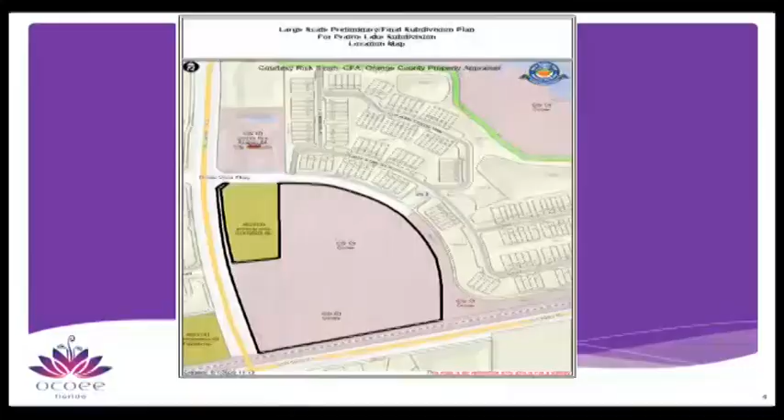Again, this is a preliminary and final subdivision plan for the Meritage Homes Prairie Lake subdivision. The property is located on the northeast corner of Clark Road and A.D. Mims Road. As you see, it's currently under ownership of the City of Ocoee. Meritage Homes is under contract to purchase the property from the city, and as part of the contractual steps is seeking government approvals for such. The property does have a little finger that goes around another piece. Let me just go over the aerial.

It's forested. You have Ocoee Vista Parkway that runs between it and the Prairie Lake Reserve Townhomes. There is a tract, part of the Prairie Lake PUD and plat, that created a tract of land the City of Ocoee has ownership of to create a future extension of the road to access the property to the rear in the future. As I said, it's part of the Prairie Lake PUD, which extends from A.D. Mims basically up to Hackney Prairie, both sides of the road. We have a fire station right across the road.

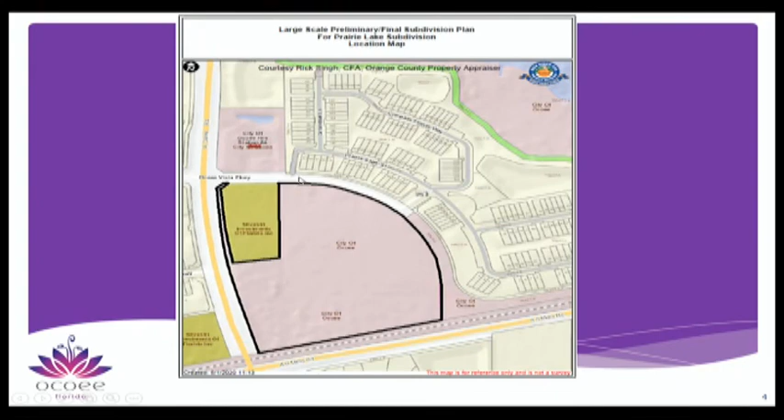The tract, under the PUD, was a commercial tract. Under our comprehensive plan, in commercial and light industrial, if you do a mixed-use development, you can have forms of medium and high density. So the parcel will contain the existing C2 owned by a different entity, maintaining a portion along the front as commercial in the plan, which creates the mixed-use development—sort of like the Weston Bay commercial up on Ocoee, Apopka, and West Road, where you have the four lots with the Dunkin' Donuts and then the residential homes behind it. It's the same philosophy.

So we have a preliminary and final subdivision plan. These are engineered documents that at the end of the process, city staff will stamp approved for construction. There are no other steps after this phase.

They are proposing 74 townhome lots, consisting of a mix of 6-unit buildings and 4-unit buildings. The exterior units will be 24 feet wide, the interior units will be 20 feet wide, and the interior living area has a minimum of 1,500 livable square feet.

The internal streets will be private. It's proposed to be developed in one phase, and the access point, there's one access point on Ocoee Vista Parkway.

So this is the, come on, get there. Get my mouse to catch up with me. There we go.

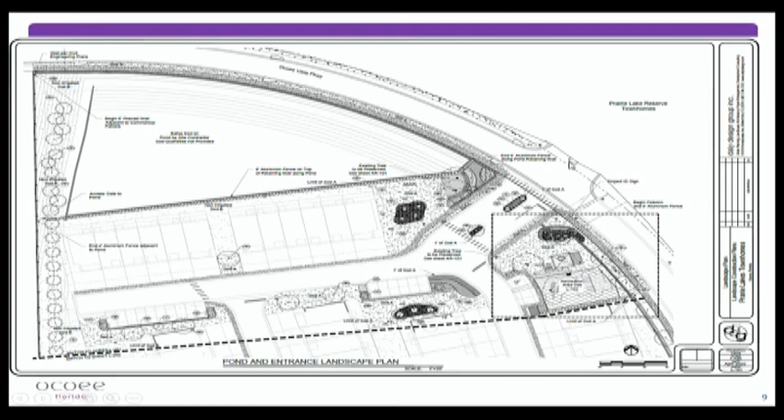The lot layouts, again, the exteriors are 24 foot, the interiors are 20-foot townhome units. They'll have open space in between them.

To blow up more of what the tot lot, picnic table, pavilion they'll have, and then you have the more passive area at the more southeastern end. So they'll have 2 tot lot areas.

This is the sort of pavilion. The fence they'll have a precast wall and mostly a decorative fence with columns. I think the columns are going to have some of the faux brick on it that I picked the wrong one for. That looks like it's all stucco, but it has faux brick which will match the entrance to the subdivision, have a little bit of upgraded look.

These townhomes, single family, all these subdivisions are part of the Prairie Lake PUD, Planned Unit Development. Back in the late 90s, early 2000s, when that PUD was approved, that PUD dedicated the right-of-way for Clark Road, the full width to encompass a 4-lane divided Clark Road, of which they constructed 2 lanes, and the inside curb of the median.

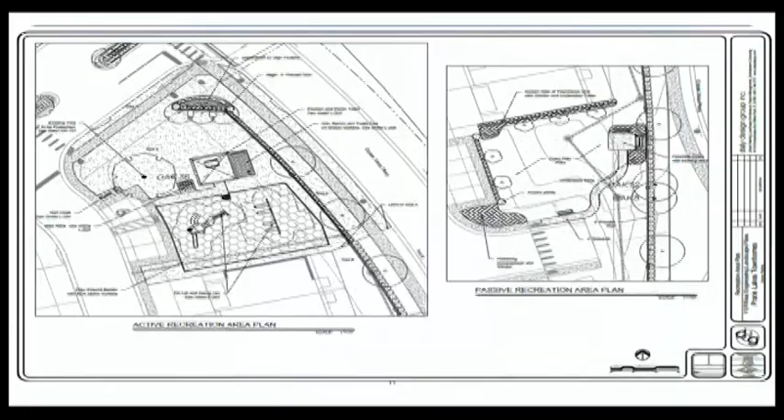Again, this is a subdivision for 74 lots. When they amended the PD, the Prairie Lake PUD has an allotment of single family, townhomes, and commercial, and they haven't used nearly the amount of townhomes which are permitted. So we did an amendment to the PUD, a non-substantial amendment, because they were not introducing a new use to the PUD, they're just moving the uses around. We changed this tract C to allow 80 townhomes, I think, more than what they're proposing. So they didn't achieve the lot number we amended the PD to by a couple of lots. With that, I'll entertain any questions, and the applicant is here.

Chairman, I do have one question. It's not specifically about the project itself, but you showed, and I missed it by the time I looked up, that there's a parcel to the east. Can you show that again? That parcel to the east is bifurcated by the railroad. Actually, there's several parcels - there's this big one, and you can't see clearly, but there's a little triangle, two little triangles. There's more parcels that go all the way over to this road.

It's all under one ownership. I've talked to people that are looking to develop it. Presently, it accesses - it's owned by this church, which is up on the other side of the railroad track. There's a little driveway right here that you can physically cross to get into the property, but it's not sufficient for a new development. And it would not ever be given that, right - that's already been looked at and discussed with the railroad years ago. So that access point would be via Ocoee Vista Parkway.

That's why, as part of this, we had the developer dedicate this land for a future road extension. There's also the opportunity - there's some wetlands here - but there is the opportunity to tie in up here. And if this parcel, or when it ever wants to develop, there's the opportunity to have two access points, depending on what it is, how many lots. We may do an emergency access to the rear, or both access points. It's just, there's some wetlands up there and floodplain. We gotta see how that works out, so.

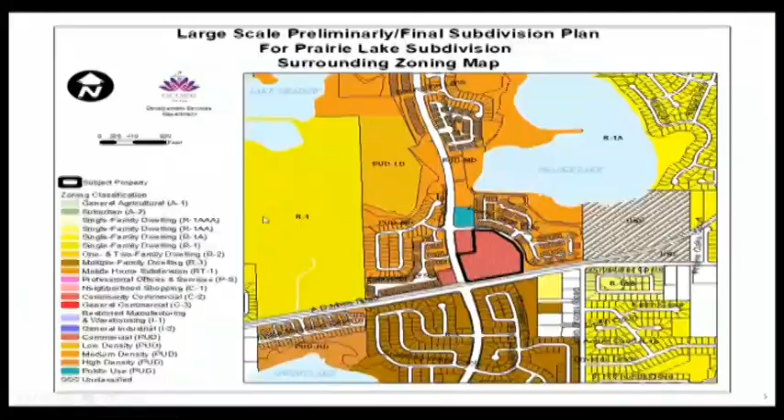We are working to get this 4-laning done through a development agreement that could speed up the process. With that design, they would go all the way to the intersection, design and engineer it for the west 2 lanes in the median. So eventually there'll be a curb cut going into to make that right turn if you're heading north. If either commercial piece comes in, that would be evaluated to do a decel lane and a curb cut to get their access points.

For this subdivision, there is not - there's just the existing access on Ocoee Vista Parkway. There were no studies done, but it's not necessary for 74 homes. Clark Road was developed 4-lane past this point with the ability to do 125,000 square feet of commercial. If the commercial exceeds 125,000 square feet, it would have to do a full traffic study because that was not contemplated in the PUD. If it comes in under that and generates 1,400 daily trips, you look at the impacts of that. This portion being really de minimis - 8 acres, 74 townhome units - creates such a low trip generation there was no need for any traffic study implementation.

All right, anything else for the applicant, or anything you'd like to add? No, we'll be here if you need us. All right, thank you. Okay, so with that, I'm going to open up the public hearing.

I'll start off by reading the 2 emails we've gotten, and then if we get any phone calls we can go to those. First one is a question from Brianne Massage, I believe it is: 'Will there be a proper turning lane coming into Ocoee Vista Parkway from North Clark Road? The turn right now is scary due to traffic levels and the lane merging from 2 to 1 right after the turn. It's not safe.' Sincerely concerned, Prairie Lake Reserve resident.

I think, Mike, that's part of what you addressed - but at this point, no, because it's already been grandfathered in with what we have. Yes, that's basically the answer to that.

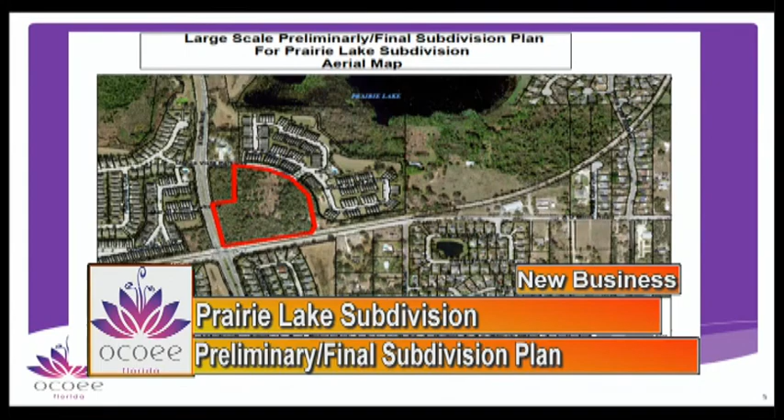All right, we've just got a few seconds left, and then we'll close the public hearing. So you don't get eventually anybody to make that commercial as well?

It is a tough location. If you're looking at this, this is commercial C2. There's a commercial node right here, and there's another one just on the north side of Hackney Prairie. The days of those little neighborhood commercial corners developing those little 2-unit retail spots, you've got Silver Star Road, which has that commercial node in Clarke.

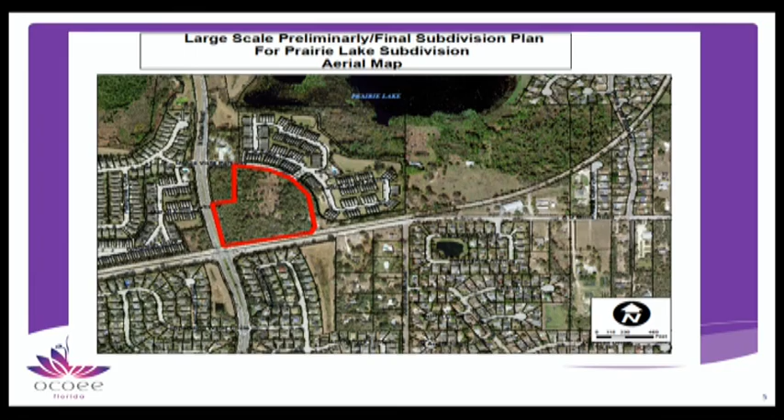Correct, all 4 corners has empty space. Maybe the Publix doesn't, but everything else has empty space. And now you have new commercial at West Road with a Publix shopping center and strip that's got some empty space. You're starting to get at the corner of Apopka Vineland and Clarcona Ocoee in the rural settlement, you've got a tire place, an auto zone, and the Wawa's looking to go in there.

The viability of this as commercial is questionable until things change. I don't know what it's ever going to become, I'd be surprised. Probably some sort of office in the future as things start to fill in and the rural nature of this area really starts to go away, the suburban rural nature.

It'd be nice to put like a little medical center, like a doctor's office, or one of those care centers where people can stop in. Urgent care. Especially with as many residents as you have in that area, I would think that one of those urgent cares would actually do rather well in there.

All right, at this point, the time has run out. Were there any calls or did we receive any emails? We didn't receive any emails. Okay, so at this time, I'm going to close the public hearing and bring it back up to the dais.

Are there any more questions? Hearing none, we only need one motion for this particular project. Can I have a motion to recommend either approval or disapproval of a large-scale preliminary final subdivision plan for project LS-2020-02? I'll make that motion. All right, there is a motion. Is there a second? I'll second it. All right, we have a motion by Member Lomnick, and a second by Vice Chair Williams.

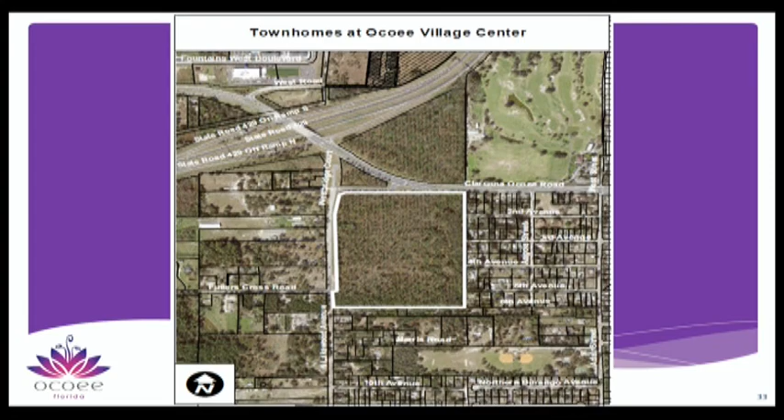As part of that large-scale comprehensive plan amendment and rezoning to PUD, there was a school concurrency mitigation required. About the time, right before we went to city commission, a new law passed dealing with impact fees and how the Orange County School Board mitigates capacity enhancement, tied to impact fees, and you can't require impact fee payment until permit issuance. There was some tie-in to the mitigation being tied to impact fees. So the school board stopped doing capacity enhancement agreements, and they still have not proceeded forward. So this case was approved by the city commission and this planning and zoning commission, subject to that CEA. They're still working out the details of that CEA with Orange County, and the developer, Rick Wolfarth, is going forward with preliminary and final engineering on the aspects of the development.

So we're taking it to this point. We've got a hold, we can't go to commission. We're hoping to take a nice package in June, maybe July, of the recorded ordinances and the final site plans all together for these phases.

We're going to start from the north. So we have the Allure Apartments, which are going to be on the north. You have another item, which is the southeast retail, and then you have the townhomes as the third item.

This whole area is within the interchange character area. We have a zoning overlay which has a vision for pedestrian-friendly, higher architecture, connectivity, public open space that covers these parcels and the parcels to the west. It's surrounded by the Forest Lake Golf Course on the east side.

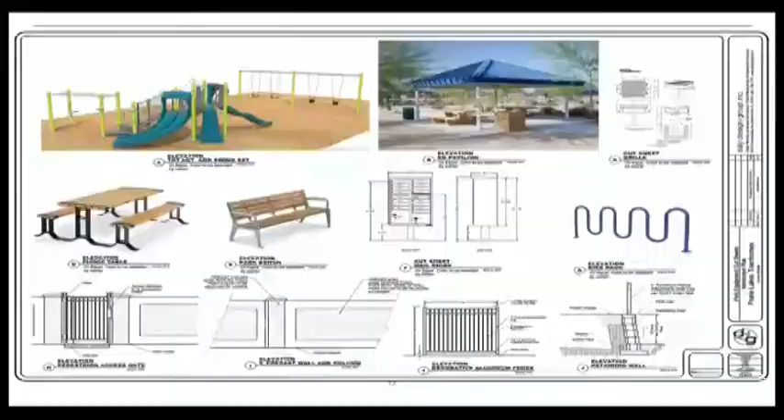So what are we looking at today? We're looking at the Allure Apartments. It's a preliminary and final subdivision plan located on the northern part. In the plan unit development, this will be lots.

As part of the PUD, we required a hotel site to be located on this end. Let me see if I can show it better. A hotel, and then we have retail with the buildings closer to Ocoee Road. The properties are all highly vegetated, have planted pines on them.

So the Allure Apartments, what is being proposed? As per the plan unit development, a 320 unit multifamily apartment housing development. There's 4 apartment buildings containing 80 units in each one. A 10,000 square foot clubhouse will anchor a pool and the other amenities. There's 4 garages for covered parking, a dog park.

The apartments, as part of the PUD, we required 4-story urban apartments, so it has less 2- and 3-story units than what a normal garden apartment design would have. This is very similar to the apartments we have on Bluford behind the racetrack, the Oasis.

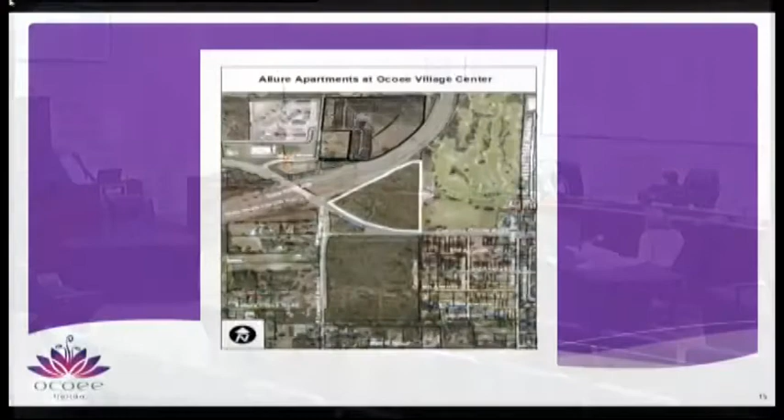Are there any questions before we go to the public hearing? I like it. Part of that, he's bringing sewer and water from the Montessori school all the way up to this area, so properties on the west side will now have water and sewer connection capability. This side, as part of the interchange overlay, is envisioned to have more block neighborhoods like this. As you'll see with the townhomes, there's a public park, and he's bringing water, sewer, and a public lift station all the way up, providing the opportunity for everyone to connect and annex into the city and develop out. That's kind of been the inhibitor on developing this area—more farms and mobile homes because there's no water and sewer available. With that, I'll entertain any questions.

I do have two questions, and I'm not sure whether it would be for staff or the applicant. The two things: one is about walls, the other is about access.

The first part about the walls—did I understand right that there will be barrier walls, but they'll be themed and have a certain character? As part of our conditions of approval, we will have a note that the city is not responsible for constructing the sound walls along the 429.

So the communities themselves, which leads to my second question—the communities will be open because there's commercial on the front, so there won't be walls there. There will be an entrance wall at the intersection here.

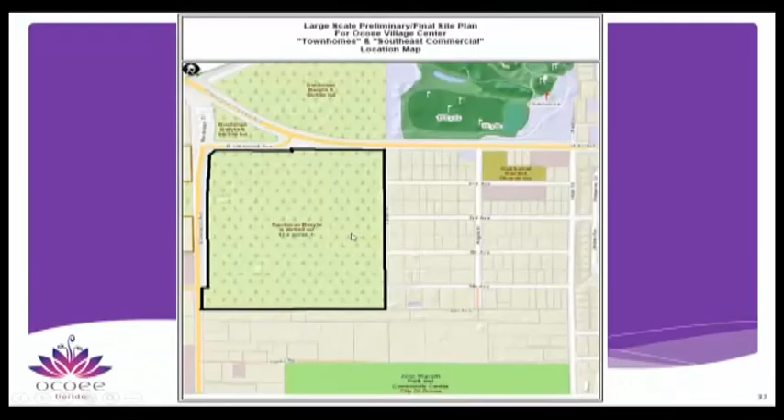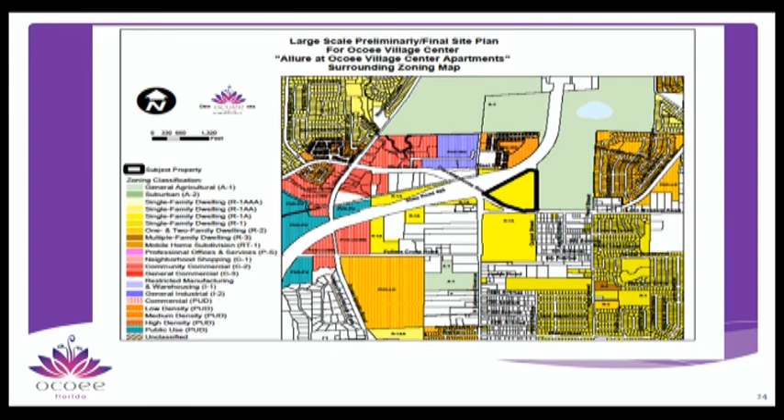If I can find it on that plan... at the intersection there'll be a decorative wall that has the Ocoee Village name as an entrance feature—like a knee wall going up. That's decorative and just creating that sense of place.

With a new pattern, the pedestrian crosswalk is highly emphasized at the Clarcona Ocoee signalized intersection, which will tie into wide, 8-foot sidewalks going into this area and then down along Lakewood Avenue.

The other thing regarding access—I may have missed if you said this—are they going to be gated residential areas or non-gated? Non-gated. For this apartment, it's not gated.

The public road will extend up to this point—this will be the extension of Lakewood Avenue. Beyond this is the apartments, but they're not gating it. There'll be a ring road that comes back behind the commercial, so you'll enter in and access the commercial from the rear.

Additional questions? Given that this is phase one of this project, north of Ocoee, correct? I just started from the north and went south—probably should have gone south to north. Phase one will be the construction of the road, running the infrastructure, all the utilities, the apartments, and phase one of the townhomes.

That was my concern—are we going to have infrastructure before we get over there? Everything's getting there, yes. Everything's going there.

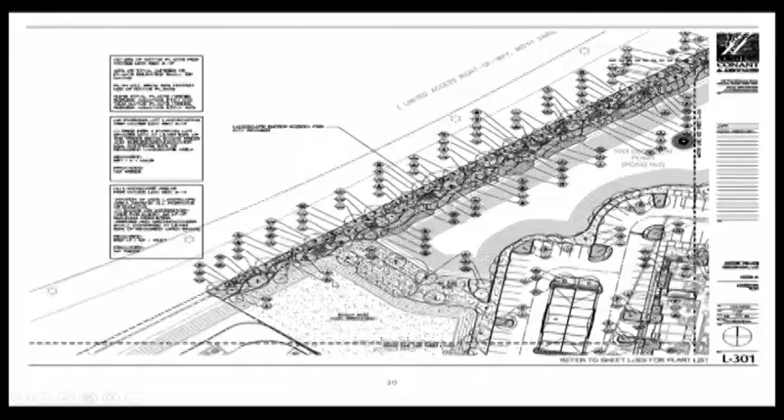Is there any kind of footpath going across where it crosses the 429 to get over to the Publix area? No, there isn't—as part of the golf course, there's no tunnel available for that, but there is a sidewalk. The golf course has a tunnel they go under the 429 somewhere back here, but no, it would be going this way.

As part of the PD, this road envisions a future where this road gets vacated because the alignment comes here, and on this property, we're hoping to get a grocer.

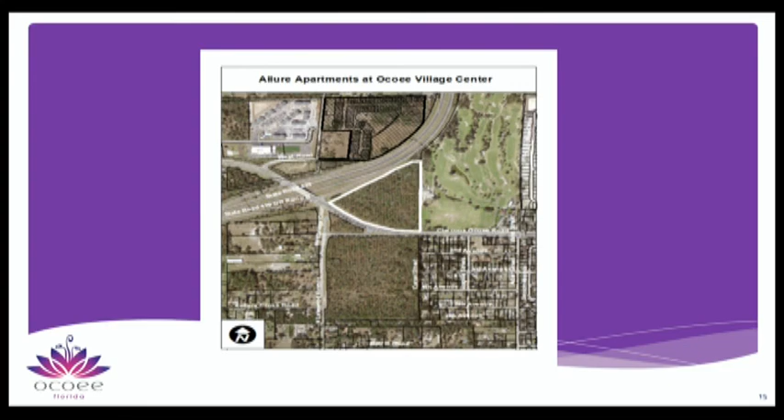But that's sort of the Sprouts and the Lucky's are not expanding. The commercial is being developed by Conover South, and I've been at ICSC, International Council of Shopping Centers, shows in Vegas and in Orlando with them, meeting with them and showing the site. So it's actively being marketed.

We've sent a lot of phone calls to prospective hotels. The one going on 50, we first showed them this because we knew that was a sure thing. This market is getting there with the rooftops and the commercial to support a hotel, it's just nothing's hit right yet. The hotels need to be able to purchase the land, and that's what Conover will sell. A lot of our other developers on 50 want to retain the land and do a ground lease, so that's kind of limiting the hotels.

I got one question for you. The dog park, is that for just?

It's an amenity to the apartments. You'll see, there's a future park later on - a public open space that they'll dedicate the land for, and it'll be a public park. I'll show that to you later on. I'm just curious only because I know there's been talk on and off in the city about having a dog park, and I was wondering if that was it.

Yes, we are working on a plan for a public dog park in the city. That would be advertised as such. All right, any other questions before I open the public hearing?

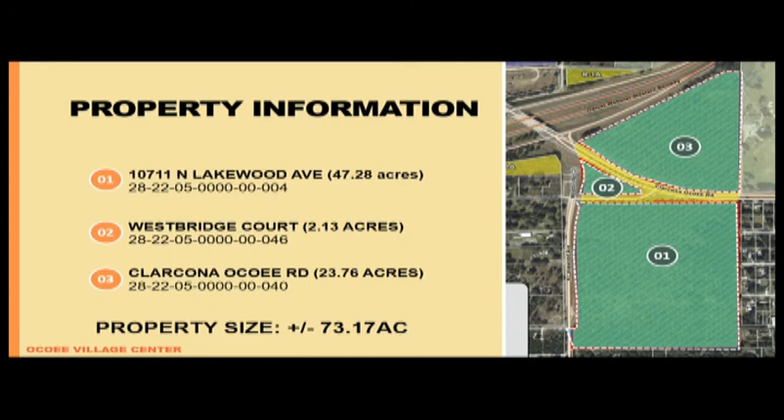There are 3 properties that make up this site, 73.17 acres gross. You can now see from looking here, you have the apartment site that Mike's been reviewing with you. We have the commercial, which will end up being here, and then this is where the townhouses go. Looking at an aerial view of the site, you get a feeling of how it all fits in, and you can see the property sitting over here with Clarcona Ocoee Road, the 429, and other improvements there.

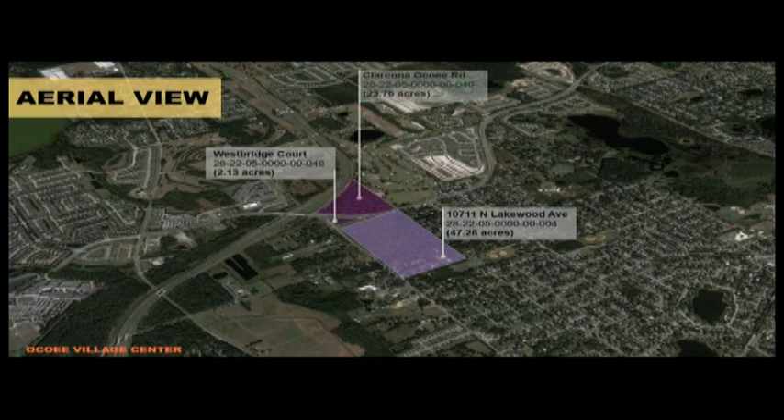There's the southern parcel, the northern, in the middle, so that's our total. Now, the way we've envisioned it is that you start seeing again, there's the site.

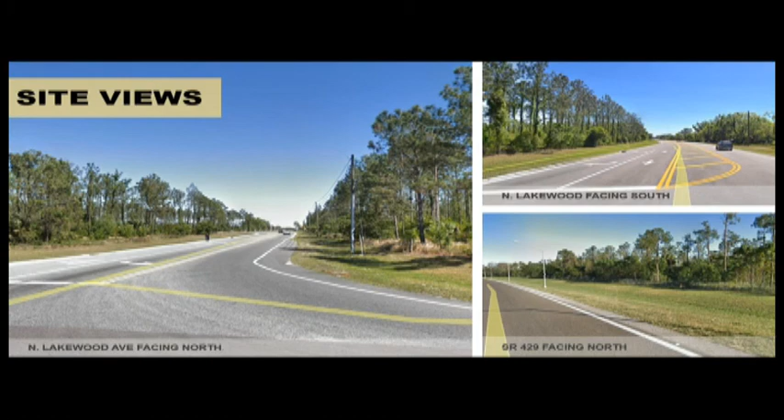As Mike mentioned before, it's a planted pine forest out there that will all be removed immediately. All 73 acres will be cleared as the first step of this project.

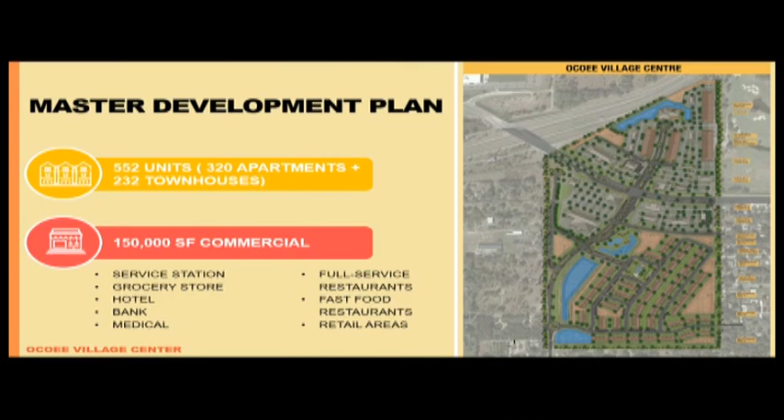We have 552 units: 320 apartments, 232 townhouses, total of 150,000 square feet, and you can see the various uses that are spelled out within the development order itself.

This gives you a better idea of the whole project. So here's the apartments that we've been looking at, the Allure. We are rebuilding North Lakewood down to this roundabout, and this road will then get abandoned right here.

And what the end benefit will be is we will now have a connection to 2nd Avenue here into the subdivision to the east, and 5th Avenue.

So now we have 232 townhomes. We have our own amenity rec center right here, which will have a pool, a cabana, playground, an internal dog park for the residents, and then a play area.

In addition, though, we're donating a parcel of land that will end up being a city park. That park was recently designed by the city, and this is now the plan that we think we're going forward with. We have a nice lake area, a green area, and some play areas right here. This is not only just for the residents of our project, but this will service the area for recreational uses.

We have a commercial area here. Our first step is to build this, which will be a 7-Eleven with gas. We have 12,000 square feet of commercial. At this point we have about 4 or 5 of the 8 users pretty well fixed. We will build this project right here, right at the very beginning.

So again, we'll clear the site, realign and build the road, put all our utilities in, get all our water management systems in, fill all the property, and we will build this portion of the commercial, build all 320 apartments, and build all 232 townhomes.

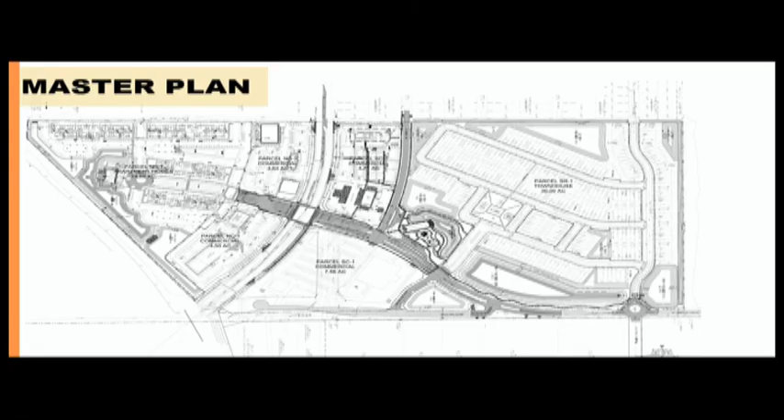As part of the land clearing, under the contract, the property owners will utilize their agricultural exemption and log it. So it'll be cleared under a logging permit with forestry, and then they'll utilize that to move forward with the site development. Yes, we are definitely logging. It's a plus for everybody.

There's the roundabout here at Fullers Cross. Here's the extension of the existing North Lakewood. Again, we're realigning the road, so it'll come up to here, hit Clarcona-Ocoee. This is our commercial on the corner, 7-Eleven, strip center. These are our townhomes. So again, you can see the physical connection to the east here and here. We have a nice large lake over here.

One of the things we feel is a feature that really ties into the whole concept of this development is that we have bike lanes already existing out here in Clarcona-Ocoee. We are building a major pathway coming out of our apartments, 10-foot walkways from here up to Clarcona-Ocoee, and continuing that walkway down along here. You'll be able to walk right up next to the lake area and come back in, and it's a very, very friendly, walkable community.

We also have, from this point here, if you go east and north, right at this point there's an opening to the trail. If you go north and over, there's another opening to the trail. If you go up over here and to the east, there's a third entrance to the trail. So within about a 1 to 1.5 mile radius, we have 3 potential connections to the trail, mainly connected by existing bike paths and walkways, and our goal is to enhance that to make it very usable for everybody.

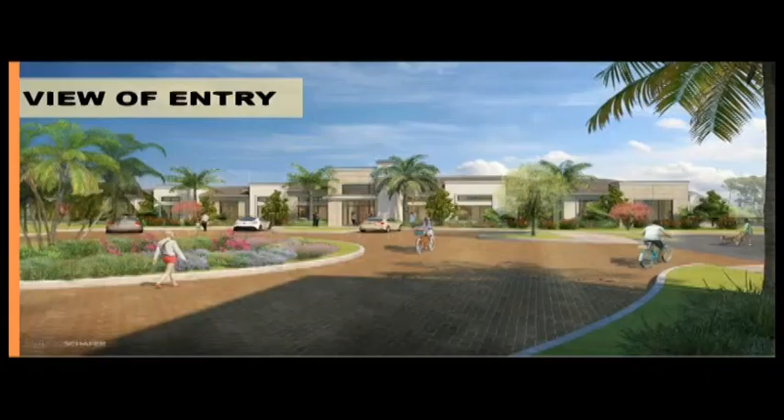This gives you an example. This is, again, back to the Allure. This is as you're driving up. You saw there was a cul-de-sac at the end. This is what the amenity looks like, the 10,000 square foot commercial, and the recreational area.

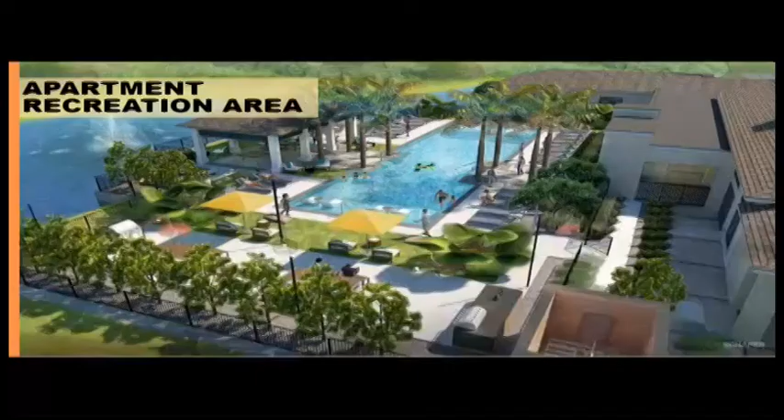You'll see here it has a very advanced pool area, cabanas, barbecues, eating areas, little play areas back over here, plus a very extensive set of amenities for the building. So it is an upscale community.

We do believe that, when you start looking at the buildings in a few moments, you'll see that these are a step above. So the rents are going to be a little bit higher. What we've done, and this is something the city wanted going through this whole program, is there are more 1 and 2 bedroom units. 90% of our building is either 1 or 2 bedroom. The reason for that is they're a little bit smaller units, but they're an upgraded unit, so they still become somewhat affordable.

This is not being geared towards families, it's being geared towards young people. From this area, it's great. You can live here and work in Maitland Center, get downtown Orlando, and it becomes a really good way of getting around. We think this location is going to do very well.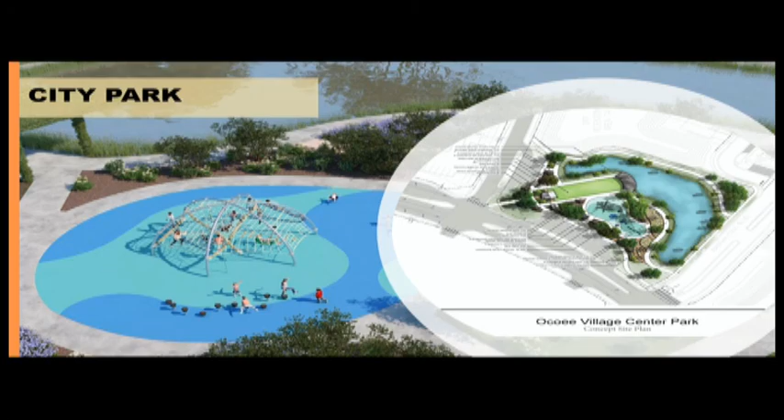It was a collaboration between the urban designers we have on staff and the Parks and Rec director, to come up with a plan for a public park that we have to maintain. We understand how it needs to be maintained, and it provides stormwater functionality. We will take this to the city commission to get further comments on the park, and then finalize this new public amenity.

But again, the key issue here is this is a public park, not just strictly for the residents. As part of the character overlay requirement that there's a public space, this meets that criteria.

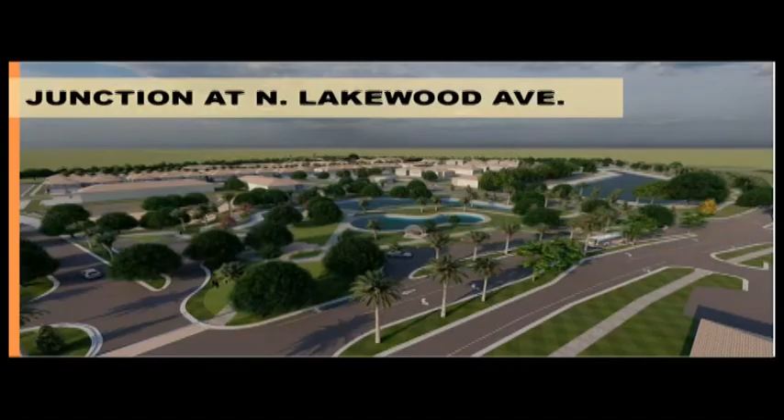So we start looking at this, just getting another view. Here's our townhouses over here, and again, we're coming up the road. Here's the city park, and there's also a linear park leading up to it. Now these are just other views looking at the project, looking back at the park. These are the buildings, 4-story buildings as I mentioned before.

They have a nice look to them. One of the things you'll notice is these have been lined up, so as you're driving into the community, it's not just blam, you're there with a gate. We're trying to bring the whole community together, so as you're driving up towards the recreational building, you'll have a very nice view. There's parallel parking in front of these buildings where you could park and walk into the unit, so we felt it'd be a very friendly community.

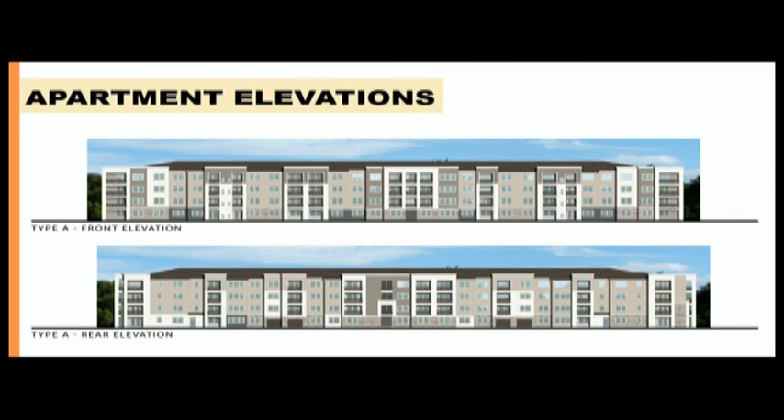We looked at the idea of gating or non-gating. We started with gating, but after working with Peter and others, we ended up with all non-gated communities for both the townhouses and the apartments. These are the townhouses, and we're excited about them. This is a client of mine.

So, Chairman, some of this will carry over to the next two public hearing items. Yeah, he's kind of showing them all.

This is the original builder of Park Square. They've been around a long time. I actually did a project with them with these buildings over on the east side of town. When initially we were coming in here, these were all going to be one-car garages, and then we changed to all twos, and we went back and forth. This is a very tried and true product that's been built over and over again. It has a really nice look to it, and we're excited about this product being introduced here to the city.

Now, when you look at a project of this magnitude, there are benefits. We're spending about $121 million. By the time we build all the improvements, the apartments, this, that, it ends up being a very substantial amount, and that's the actual ad valorem base amount, probably in about the $135 million range. That would generate for the city about $750,000. Overall, when you take schools and county and the rest, it's about $2.5 million a year in ad valorem taxes, so it's a very significant amount of money coming into the city.

That doesn't even take into account all the work we're going to be generating here. To spend $120 million in construction, we're going to have a lot of people out here working for the next 3 to 5 years. So we think it's a very important part of what we've done here.

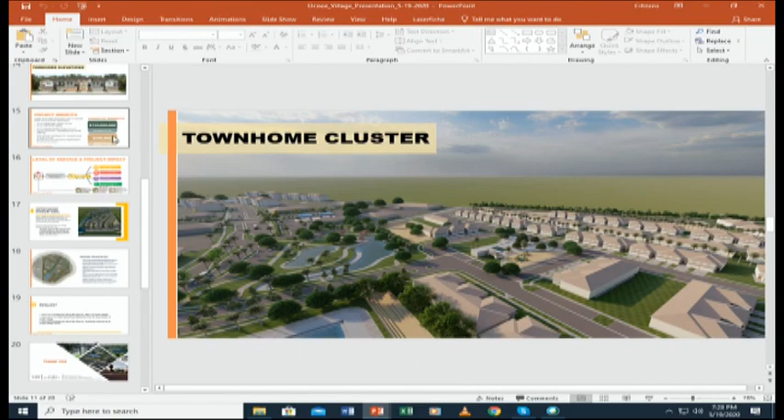At this point, the townhouses, the apartments, the southeast commercial are pretty well committed to go forward. Right now we have an agreement that was delayed because of the virus we're going through. We have the Learning Center wanting to put a daycare on the corner over there, and we have a lease all but sold.

So if that happens, we've had Starbucks ready to go. Then this happened. So we believe that if you start looking at all the pieces, Walmart has even gotten back into the fray. Michael mentioned grocery stores. It's probably the toughest thing out here to get a grocery store. Our hope is, once we start seeing the rooftops and the commercial, we'll get some people looking at it again.

We believe there's a 50-50 chance we'll see that. It's going to be a big reach, but it's clearly needed in the area. There is a need for another grocery store. We have an area already allocated for it, and we're going to continue working on it. Conover has some very good ties with Walmart, and we think that's a possibility in the future.

Now, the level of service you start looking at here, all we're looking at is whether the project meets all the criteria. Our level of service for water, wastewater, solid waste, all those areas, when we went through the review process, that was all part of the review, and this project meets and exceeds the level of service for all aspects of the concurrency check.

The overlay goals, I think we've gone through those, but in essence, the concept here is to try to make this a cohesive community, and we believe the plan that we've done is actually doing that.

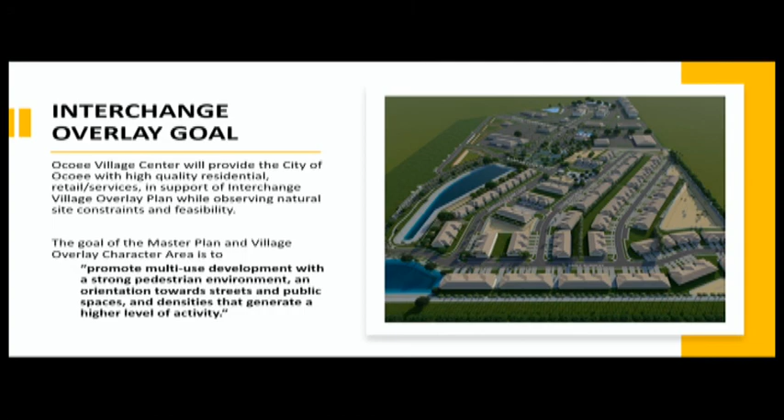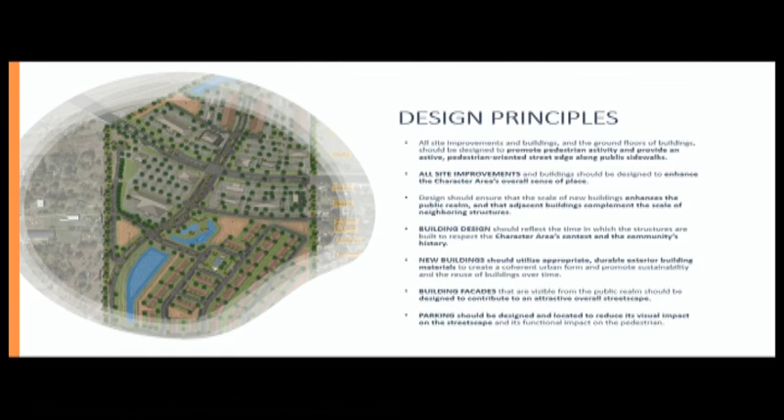Design principles, again, I won't go through those, but these are the principles that were established by the overlay district. We believe we have gone through and tried to meet as many of those, and with the help of the staff here, we've achieved that. So it's going to be a project that I think we'll all be able to be very proud of.

Tonight we already talked about the Allure. Mike's going to talk to you more about the townhouses and the Southeast Commercial. But I think by doing this, at least you all have a feeling now of how all the pieces tie together, and I'll be here to answer any questions.

All right, thank you.

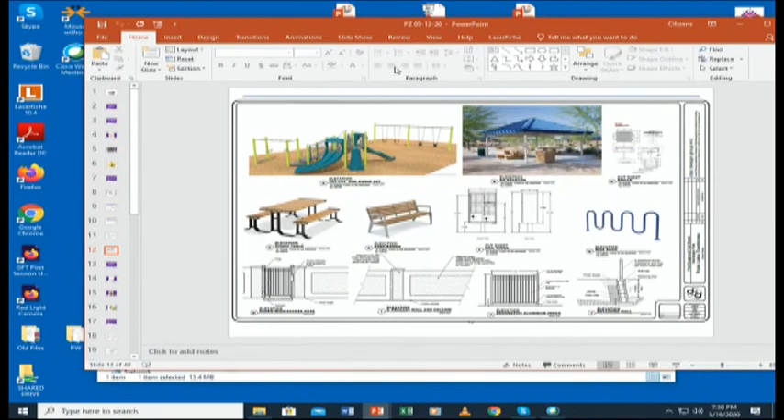Any questions for the applicant before we move on? Do you want to limit it only to questions about Allure, or can we ask about the others? At this point, I'm thinking I'm going to move all of the comments into all three, so I don't have an issue with asking additional questions since we're going to move the comments over for all three of them.

Well, my question is, you talked about the market for the apartments, the 1 to 2 bedrooms, looking for probably single professionals or starting professionals coming into the area. What is the plan or the target audience for the townhomes?

The townhomes are also an entry-level type of housing. What we think is really great for this area is, I've been involved now with, this will be my 4th project here in the city, and everything I've done up to now has been medium to small size lots, single family, which if you look at the corridor along Clarcona and Ocoee, is primarily what you see.

We believe that what is happening, unfortunately, is the price of housing continues to go up. Price of materials, everything about it keeps going up. And as it goes up further and further, you lose more and more people who can afford to buy houses. So we feel that this is a nice entry-level product. It's funny, I've gotten older as time has gone on, but to sit here and say, in 2020, this is very much entry-level at $220,000 to $250,000, but that is what we're dealing with today. Single-family houses in this market in Ocoee are getting tougher and tougher to get under $300,000, so at that point, you do lose a lot of buyers.

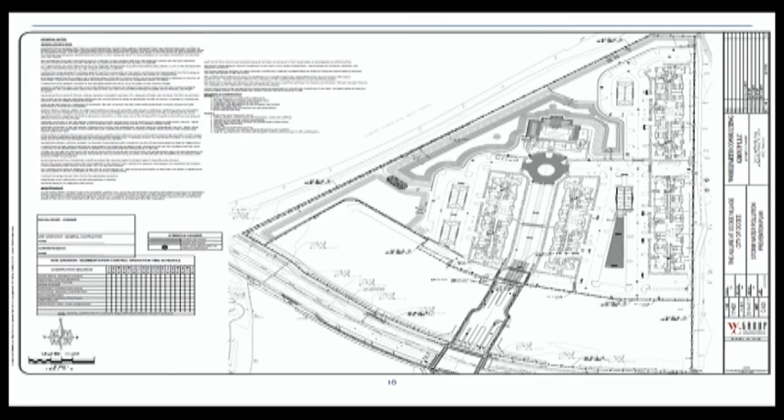Okay, so we're going to utilize that signalized intersection there. Yes. Okay, gotcha. Is that road going to stay 25 miles an hour right up into town? Hopefully—isn't that what it is now? Yes. There's some sections in the county that are 35, like when you get up to 8 Mile.

We want constrained roads. We want people to slow down. We want pedestrians to feel like they're wanted and to get up to this park. As we get ownership of Lakewood and design and fund it, it'll have wide walks, 8 to 10 foot, all the way down.

That's good stuff. And then in the future there will be a connection—Worth Road—as you get to Lakewood, as you cross into that development called Clarcona Cove. That is programmed in our comprehensive plan to be extended to Ocoee Apopka to provide an east-west connector. We own most of the land when we purchased the Rogers property.

Commissioner, but there's one piece in front we do not own. Is that one of those townhomes we did a couple months ago, where we're putting townhomes on Lakewood? That's south, that's more near Mobile Lane—the little 26-unit townhome, EMG Estates.

So when that development comes in, they'll build their section of sidewalk. There's already a sidewalk along there, but you'll start getting this development from the south into the north. As our downtown takes its final shape, we're getting calls from people looking for land, they want to be part of the downtown and in the vicinity.

This box shows the wrong plan to show, but you can see there's turn lanes. There's sufficient room to go in behind what will be the future grocery store. That'll be a pad ready. It won't have asphalt, but there's room to maneuver and access these commercial sites from the back of house with trucks. And the roundabout is designed to FDOT standard.

The roundabouts are designed based off the roundabouts that FDOT presently has in place, which meets the turning radius of the semi, there's a mountable curb if needed. These roundabouts are on 44 going into DeLand. There's one in front of a Walmart in DeLand where the District 5 office is. It's based off of the DOT's roundabout design criteria.

Good questions. That also explains why roundabouts are so expensive. You just don't have the maintenance of the traffic signals, which is nice. All right, thank you very much for the question.

Do we have any other calls? That's it, no more calls. All right, we don't have any emails? No emails. All right, so hearing that, we're going to close the public hearing and bring it back for a vote.

On this one, we just need one motion. These are all just site plan related, so there's just the one motion at this point. So can I have a motion to recommend either approval or disapproval of the large-scale preliminary final subdivision plan for project LS-2019-007?

So move for recommending approval of LS-2019-007. Second. We have a motion by Vice Chair Williams, and a second by Member Lumnick. All those in favor signify by saying aye. Aye. Opposed? Carries.

That moves us on to the Ocoee Village Center Southeast Commercial public hearing, again a preliminary final large-scale site plan. Director of Development Services, Mike Rumer, will turn it back over to you. Yes, and we'll carry forward the developer's presentation. This is a commercial center on the south side of Clarcona Ocoee Road.

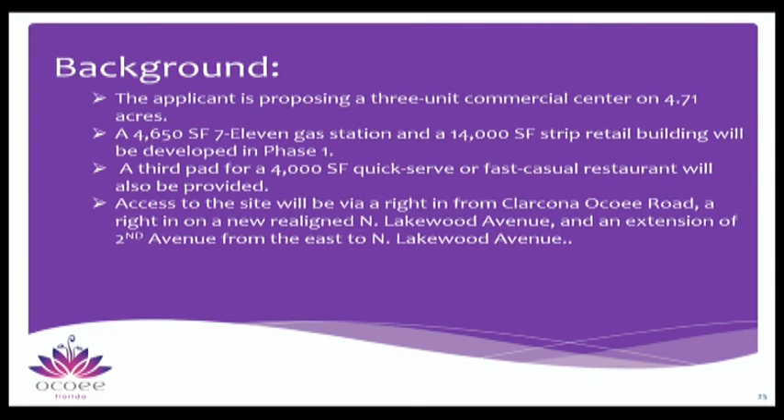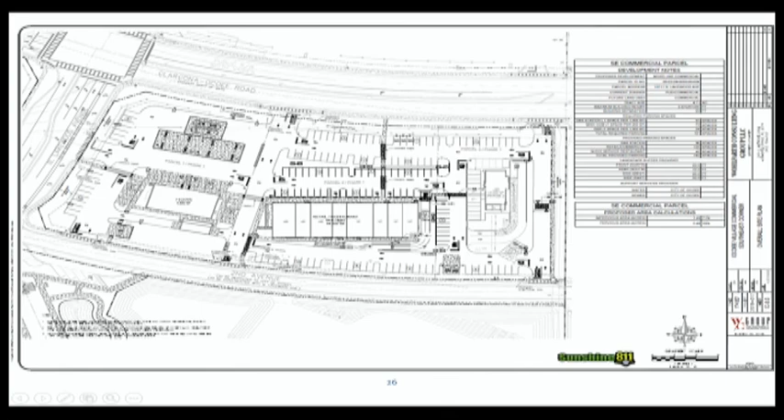What this development does is it provides this new extension of 2nd Avenue from the unincorporated area where they can come in and use crosswalks to get on the commercial site. They can now access Lakewood Avenue and the new public park. This facilitates bringing water and sewer down to this connection point, so we can then plan for those residences in the future to connect.

This is the footprint of the 7-Eleven you have in there to show. There's no gas stations in the area. You presently have to drive down to Clarke Road or go over to down at Franklin. This is the retail.

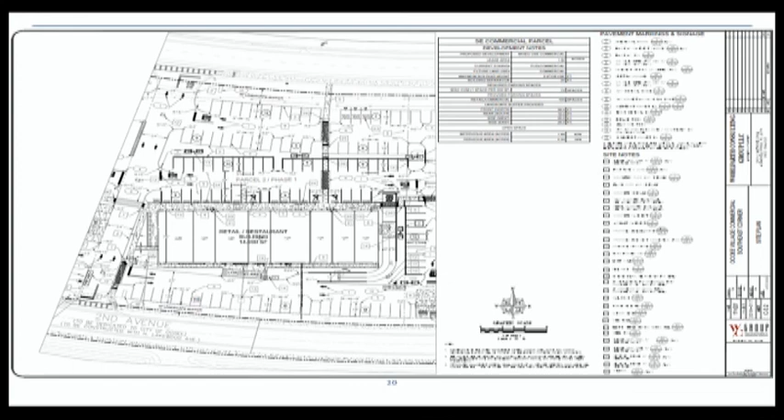You can see the ability to have that drive-through. We did a similar one on State Road 50, a 3-unit building. It has a Huey Magoo's chicken tenders, a Dickey's barbecue, and a cell phone carrier. Then this is the 4,000 square foot, which is large for a quick service restaurant and fast casual.

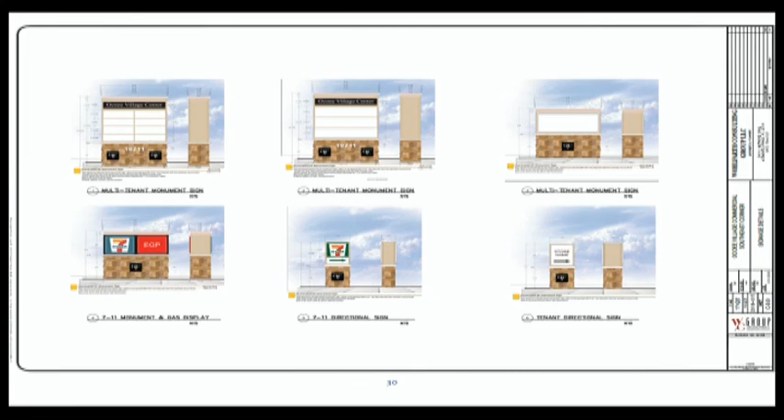The signage will complement the entryway into the Ocoee Village Center PUD that you'll have at the corners. Really not much else. It all ties into master stormwater ponds, which will be built in various phases, and along Lakewood Avenue makes a nice linear park with a waving 10-foot path, and that's really kind of it.

For the commercial, this doesn't have any school capacity issues. It creates that. You can see there's dedicated turn lanes straight through, double left at Clarcona and Ocoee, and a left into Second Avenue, so now these residents are able to utilize this and not have to go up to the end and around on Clarcona and Ocoee at Adair Street and stuff like that.

Think of the road where the church is - it gives them the opportunity to walk and bike without having to go along the main road. Clarcona and Ocoee has the bike path, so it's not as dangerous, but allows them that opportunity.

What's the difference between this spot and the one where Dunkin' Donuts is over there? Was there a pump restriction, like you're talking about - you can put a wall on it or something like that?

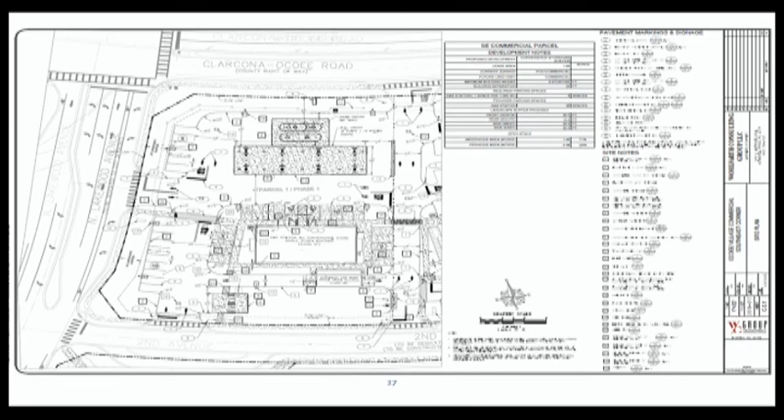So we didn't put that provision here because it's right up on the 429. As much as we want to create a sense of place, we want this to be a successful interchange requiring the hotel, so we didn't limit the fueling positions here. And you've got this ring road behind - you've got buffer, public park to the townhomes to the south. It's a good question.

Any additional questions? As Mr. Rummer mentioned, I'm going to move forward with all of the presentation and the comments - I don't know if the comments from the dais were more than just the first one, so we'll move forward with the comments as well instead of going through all that a second time. But if there's any additional comments before we open the public hearing.

On the west side of Lakewood where the shopping center is, or the grocery store, that will come back through this process. The retail in front of the apartments, some of those will come back through the process. They'll be constructing pad ready, but the hotel obviously would. If the buildings are above 25,000 square feet, they will - the other ones would be small scale, because the large scale created the pad. So you will see other projects come through on the west side of this road.

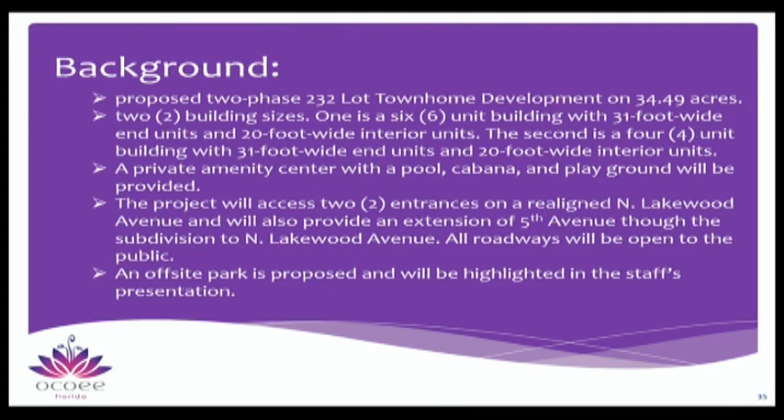An off-site park, which was designed with the applicant and city staff including Parks and Rec, is being provided in this center. So you have Lakewood, Fuller's Cross, and the access here going through to Fifth, all public roads. You have the main boulevard entry point looking into the amenity center, a stormwater pond with a wide linear park trail winding through, leading right up to the public park. The footprint of the park has changed, as you'll see later and as shown in the diagram. There's stormwater, open space in between, and pedestrian accesses through the development.

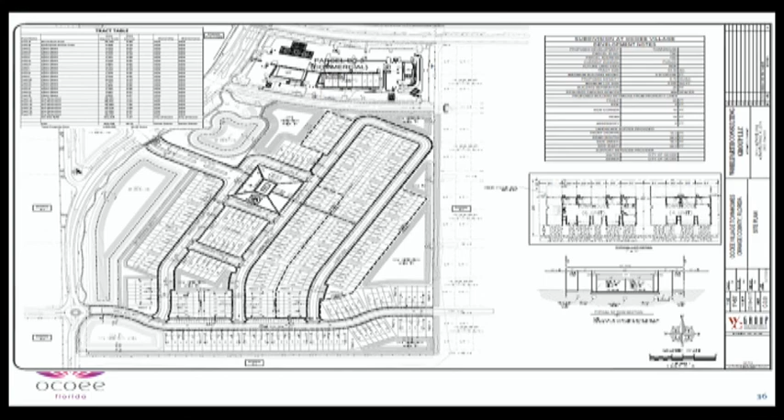Park Square Homes did a lot of the townhome developments along Clarke Road, and I don't know where else they've built single family, but I know they did a lot of the townhomes along Clarke Road.

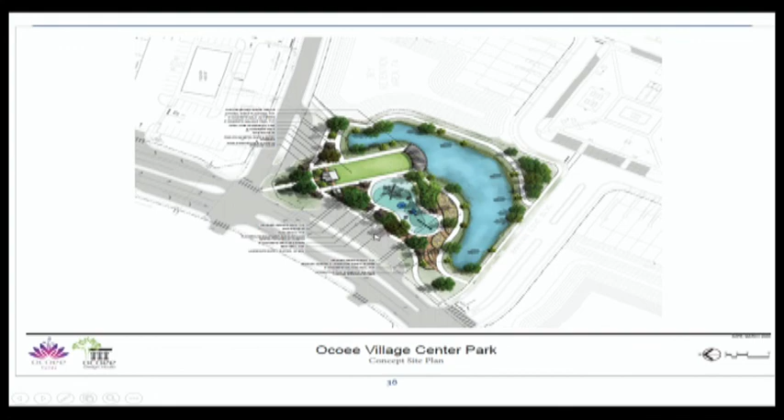Here's a little blow-up of the amenity center, with a wide right-of-way and wide sidewalks which will continue into the development. This is the park system—it's tiered, provides water retention, and has amenities like the grass area and a trellis. It has appropriate, sustainable, low-maintenance, Florida-friendly, low water use plants. It will have its own parallel parking, off-street parking adjacent to it for the public, and wide sidewalks leading to it.

So are you going to be restricting this building for the commercial to get in, is what you're talking about? The amount of multifamily units and townhomes is based off the amount of commercial that comes in. You're not restricting their starts for the commercial, right? No, just the number of permits we will issue. So at some point they'll get to the townhomes, they'll submit a bunch of them, and we'll say your commercial hasn't lined up—we'll review these townhome permits but won't issue them until you get there, and we'll have that all worked out. Okay, so you will affect their starts. Yes, it can affect the potential issuance or CO based on how much commercial has come in.

With that, you saw the renderings. This, as in the apartments, is kind of subject to that CEA, but it fulfills the vision of the character area by not only providing pedestrian and bicycle access and cross-access through, it provides public open space with the park, which will be dedicated, and the linear trail, which will be built along Clarcona-Lakewood Avenue. It brings up the water and sewer that has the capacity for other future development to tie in. It provides bike trails and wide walks. It has a continuous theme. So with that, I'll entertain any questions. All right, again, we moved forward.

We've got some exciting things happening up in this area besides all the rooftops and the mixture of developments. We have a very high-end baseball training facility going in off of Adair Road, partnering with the city where the park is, the Sorensen Fields. Very nice. This academy, a high school level baseball training facility, brings in not only smaller colleges to scrimmage during the season, which they will be coming to Ocoee in those fields, but they also bring prospects. They bring in baseball professional scouts to look at the prospects. Scouts typically come in early in the week, Tuesday, Wednesday, and watch the players perform. These players get signed on to major league contracts and top colleges. That is now officially located in Ocoee—they broke ground on it. It's called the Next Level Baseball Academy, just down Clarcona and Adair, so we're trying to utilize that. They've had a very successful tournament with a lot of teams pre-COVID, showing that need for hotels, that we can get midweek rooms from these schools that travel, and the tournaments and scouts that will be using these rooms midweek, which is an important time.